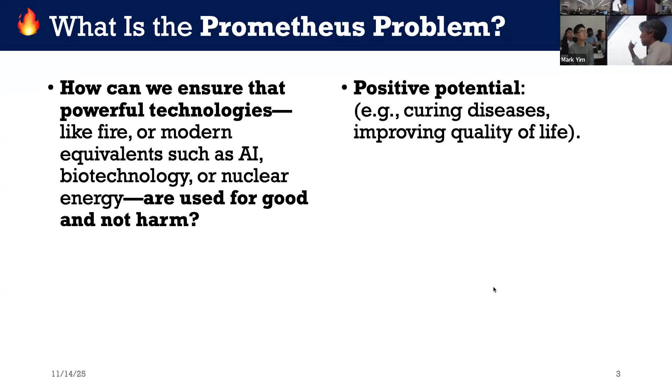So what is the Prometheus problem? Essentially, how can we ensure that the technologies that we develop as scientists and engineers can be used in a good way, not the bad way? There's always a good side and a bad side to different things. The positive potential, you make some kind of cure for some disease, or you develop some improvement to the quality of life.

On the other side, if we have some high-tech cameras or something that's really great for a variety of things, flying drones, but they can also be used for surveillance, or there are bad sides to autonomous weapons, environmental damage, or things that we do that can be negative. And so there's often the weighting, how do we evaluate the good versus the bad? And that's essentially what we're thinking about with the Prometheus problem.

So essentially the talk I'm going to give today is split into 2 parts. I'm going to talk about modular reconfigurable robots. This is what I've been doing for 3 decades. So I'll talk about that, and then in the context of robotics, I want to spend a little bit of time about responsible innovation and think about how robotics could relate to this Prometheus problem.

And also, hopefully, we can have an interactive discussion with you, just to think about what is responsible innovation, how should we think about things in terms of helping scientists and engineers in education in universities as we develop things to do things responsibly.

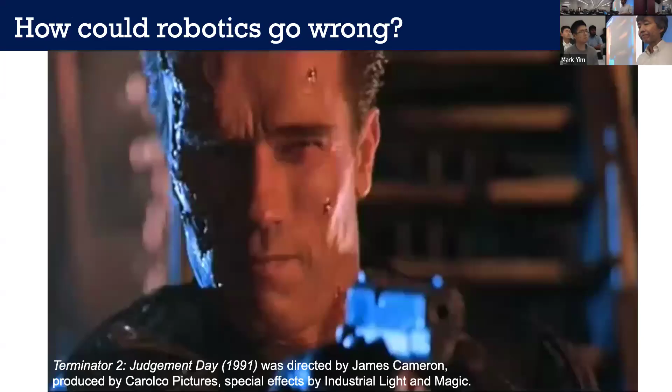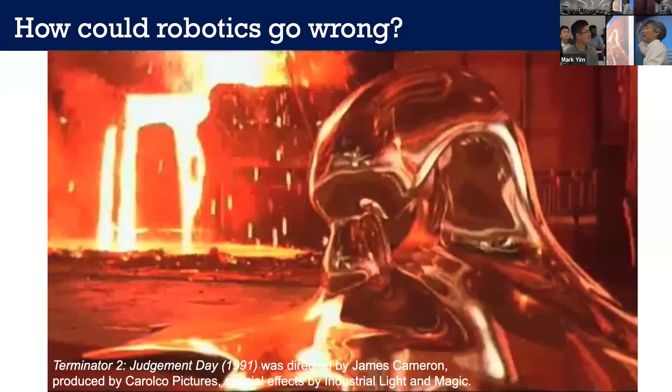So with robotics, what could go wrong? I don't know if many of you have seen this. This is Terminator 2, the T-1000 robot. How many people have not seen this movie? Just a couple. Wow. Okay. Usually it's young students that haven't seen this movie because it's too old. It's from 1991.

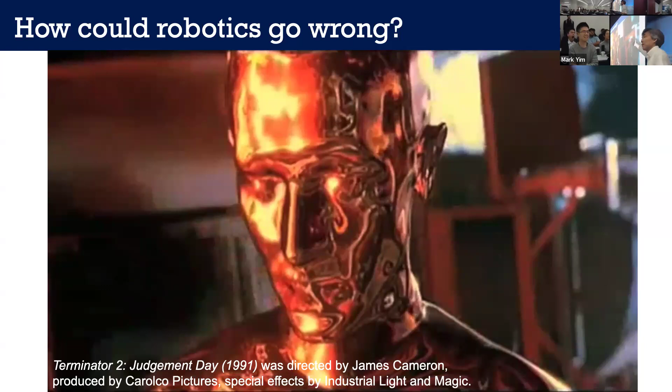But if you haven't seen it, essentially, it's the Terminator movies. It's a robot. In this case, it's the liquid metal robot, evil, kills people, bad, you can't stop them, you can't kill them. That's the type of thing. So, what could go wrong with robotics? This is like the classic example. And in fact, when we talk about modular robotics, people say, oh, modular robotics is the first step to this kind of liquid metal robot.

So what are modular robots? Essentially, modular robots are robots that are made up of repeated modules that you put together into larger forms. And there's essentially 3 or 4 different types of architectures that we can classify them. And there's what I call the chain type. So you have modules that you put together into chains, articulated chains.

And then there's a lattice type where the modules form into a larger lattice and can form structures. And then there's something we call the hybrid, which reconfigures using the lattice shape, but it can form articulated arms and things like that. So let me just show you some more examples of what each one of those are.

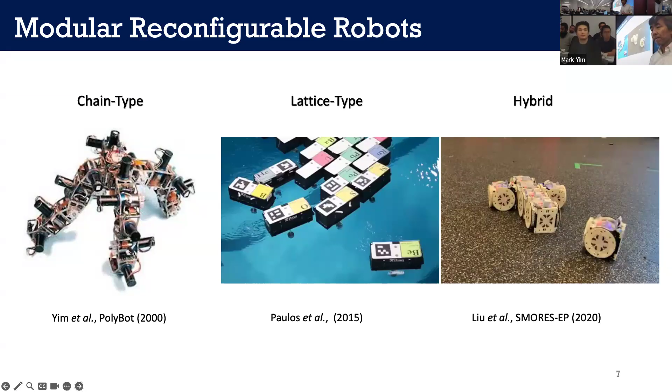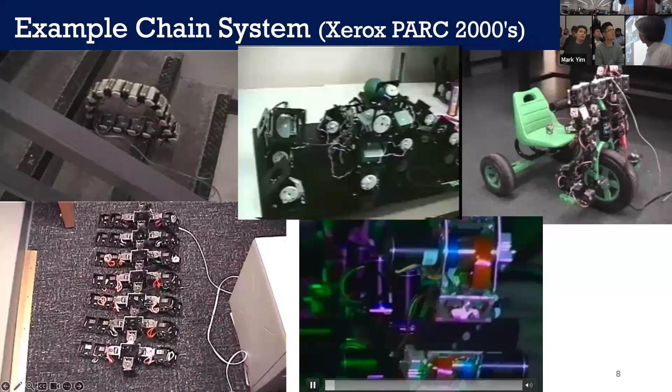So this is just videos. These are all from Xerox PARC before I went to Penn, so this is 25 years ago. These are all different robots that we called PolyBot that you can put together and that can do things like climb stairs, different forms of locomotion. The middle one is a video that's showing manipulation. Of course, we had a Xerox box on there. It was good to put the Xerox logo in our demos.

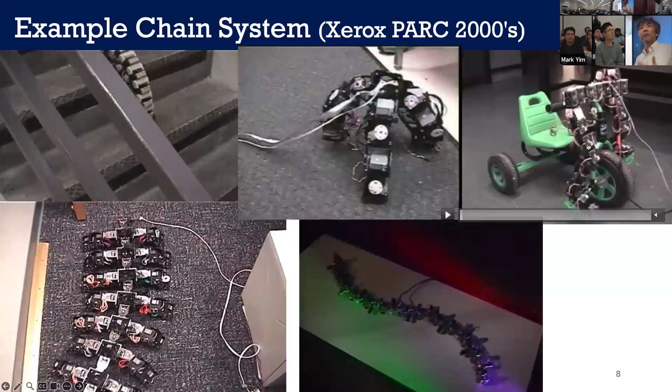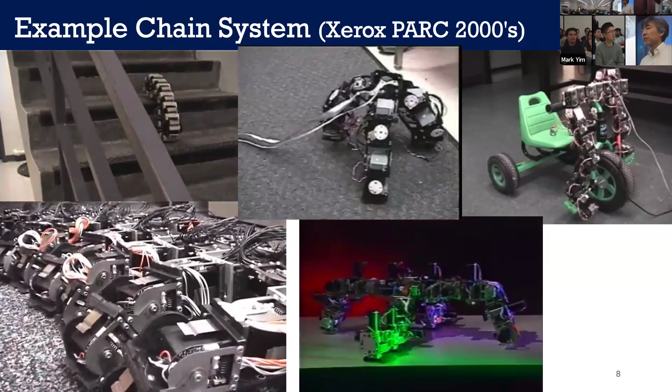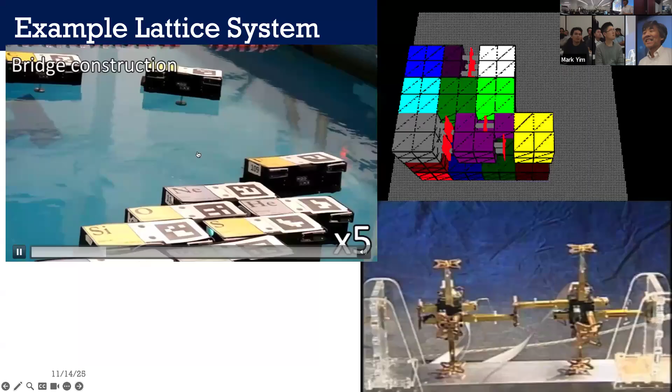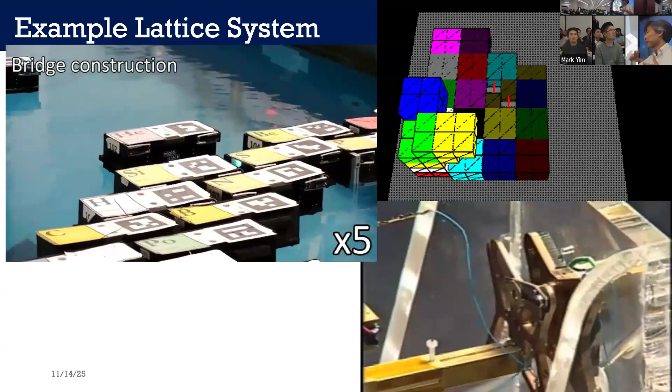This is a DARPA sponsored project that was called TEMP. The idea is this is a scale model of ISO containers. So large 20-foot containers that if they were out in the ocean, they would jump off the boat and then drive around, and you can form large floating platforms like an airfield, or in this particular case, a bridge that spans from one side of a land to another side, and you could drive cars across it or something like that. So that's forming different shapes in 2D.

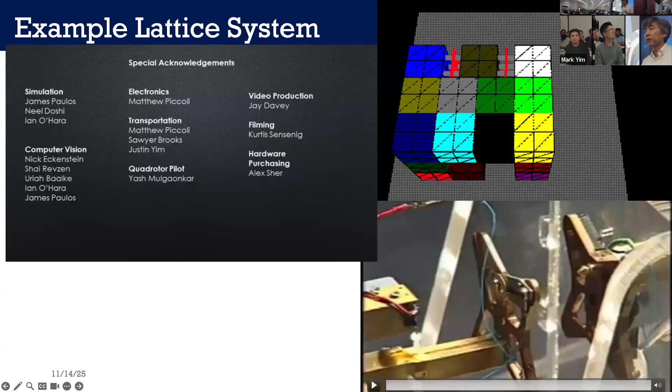This is actually what's called TeleCube. The idea here is that you have modules that form lattices, but each module is essentially a cube that has faces that can expand out and attach to other modules. And then in this case, you can form shapes by having them expand and shrink as they move around.

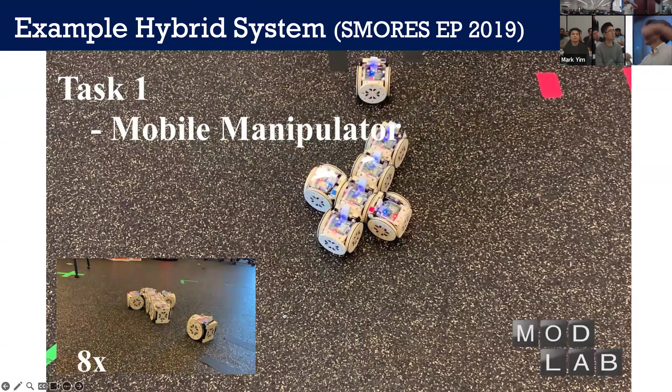So the lattice style system is good at forming shapes, but not necessarily doing things. The chain style is much better at forming arms. If you have arms, you can do articulated things. You can push on objects, manipulate objects, and that type of thing. But the chain style tended to be more difficult to reconfigure. So the hybrid one is kind of both. You can reconfigure more easily using the lattice style configurations, and then form arms or whatever you want to do some useful things.

Okay, so what can you do with these? 25 years ago, a quarter century ago, before some of you were born, we wrote a paper where I said there are the three promises of modular robotics. They can be versatile because you can change their shape to adapt to whatever task you need to do. They can be robust because if one of the modules fails, you can reconfigure. It's redundant, so you can throw away that module and keep going. They can be low cost because you have repeated modules, so you can use economies of scale, and the cost of the modules goes down.

At that time, the modular self-reconfigurable robotics research group was growing. There were more and more people. 10 years later, Kasper Stoy said this at one of the workshops we had: in reality, these things don't do anything useful, they break all the time, and they're very expensive. So basically, the first one, it's true. We haven't done anything useful with them. You don't see them anywhere doing anything useful. But I still think they're versatile in the sense that we've shown hundreds of different types of tasks we can do. So it's versatile, it's just not necessarily useful.

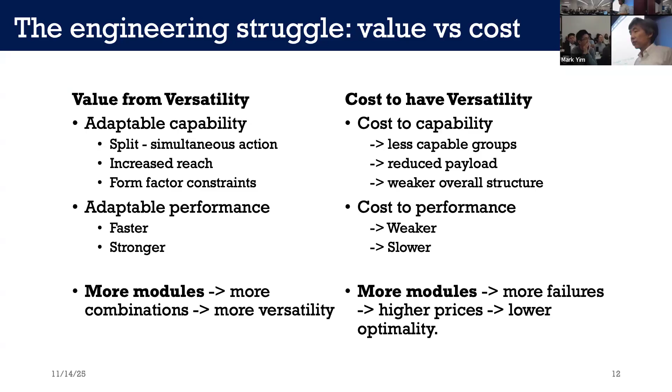So what I'd like to do is talk about 3 different issues with modular robotics. The first one is size and the number of modules. There is a tendency in the community that's been around for a while of shrinking the modules, making smaller and smaller modules. Maybe people are thinking about the T1000, that molecule-size liquid metal robot. Essentially, if you have a task that's human scale, then the smaller the module, the more modules it will have to do that task, and so it can be more versatile.

If you have more modules, you have more CPUs, more sensors, more degrees of freedom. And each module is smaller, takes up less material, so lower cost. There's economies of scale that can come into play. On the other side, making things smaller is harder. Every time you make things smaller, it's going to be the smaller CPU, the smaller sensors, and usually they're not as good. The total system cost is what you really want to worry about. If you have a $1 module, that's great, but if you need 1 million of them, it costs you $1 million. And sometimes economies of scale don't actually scale faster than the total system cost.

So I want to stress the difficulty in miniaturization. My group has designed many dozens of different systems, and all the time, the thing that we struggle most with is squeezing things into the design. The miniaturization is the hardest part. So I want to give you some examples. Here are some of the lattice-style robots.

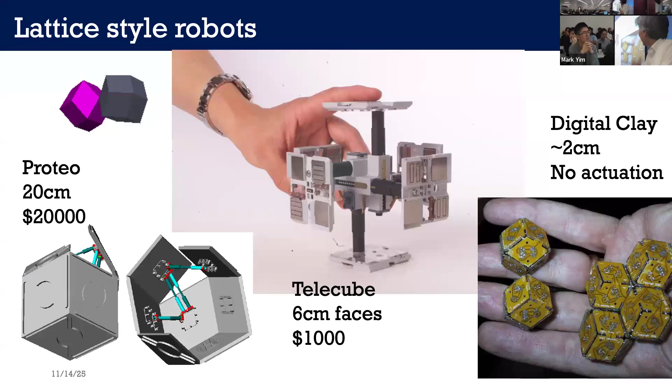Essentially, the cost of shrinking down is loss of functionality. And it's just hard. At the time, putting actuators into something that was 2 centimeters was really hard. And theoretically, you could do something like shape memory alloys, but even then, getting it to work in useful ways is difficult.

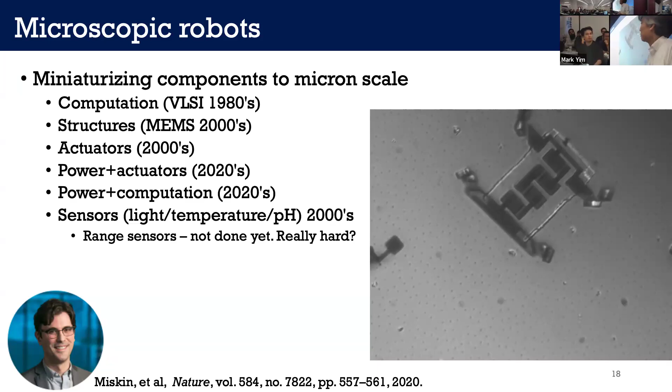You can put temperature sensors, you can put pH sensors, you can put sensors that sense different properties of the area, but range sensors are very difficult. And that's the thing that I think every mobile robot has these days. So if someone could come up with a miniaturized low power range sensor, that would be super useful. I don't know how to do it, but that could be the next step. Okay, so that's miniaturization. Maybe we're getting towards, I don't know, it's hard getting to the T1000.

Next issue is strength. One of the things with modules is that we characterize them with something that we call characteristic strength. That is, as you put modules end to end, how many can you extend in a cantilever fashion that can support its own weight? And usually there's this square cube property where the actuation strength goes by the square, but the mass goes up by the cube. Therefore, it gets harder and harder, especially when you're cantilevered. The torque is not quite quadratic, but something like that. It goes more than linear.

So it turns out that for our old polybot systems, this one had a characteristic strength of about 3. It could only lift about 3 modules. This one, the G1V3, where we had a harmonic drive, we put everything in there to make it as strong as possible. It still only had a characteristic strength of about 8. It could only hold about 8 of its own weight. So that really limits what you can do. You can't have a system that's really big by extending a single arm because it can't lift its arm alone. So one thing you may think about is doing things in parallel.

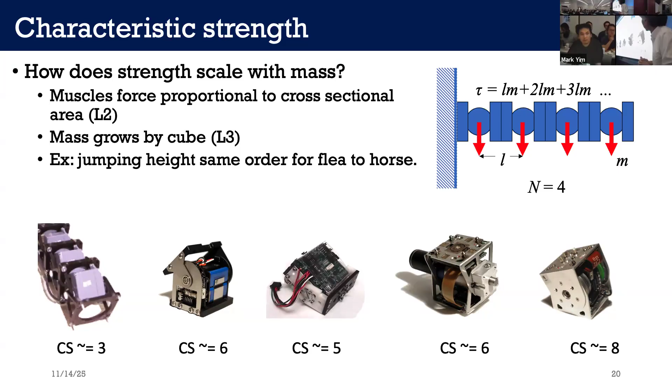If you look at animals, it's kind of interesting. The jumping height of a flea is about 20 centimeters. The jumping height of a horse is about 100 centimeters. That's roughly the same order of magnitude, even though the mass is 6 orders of magnitude different. So the jumping height is basically the same for animals, probably because the muscle's force is proportional to the cross-sectional area. It's L squared versus cube. But if muscles need to be stronger, you put more in parallel. So can we do that with modules?

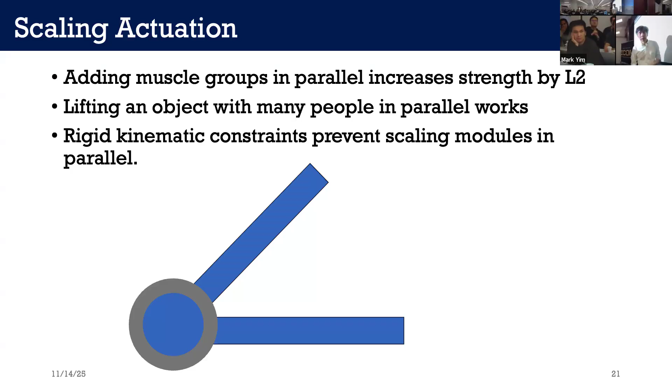Theoretically, you could attach a module to a joint, and if you wanted more strength, you could add another module along the axis and double the strength, or just keep adding them along the axis. But you can't put them elsewhere. If you put one here, maybe it could help a little bit. If you put multiple ones stacked together, you could kind of help it move a little. But because the joint axis is different, you can't just add them. Here you can add them linearly. It's not L squared, it's just L, linear with the number of modules you add, which is unfortunate. So we can't really easily put them in parallel the way you would with muscles.

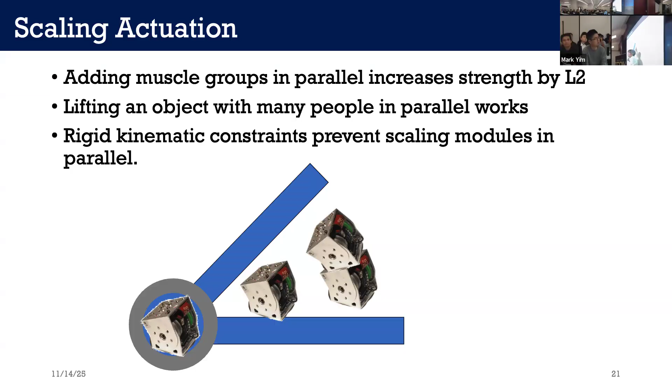Also, intuitively, you can think of it this way: if you want to lift this table and it's really heavy, you get 2 people. If it's even more heavy, you get 5 people, and everyone kind of lifts in parallel. But that's because the kinematics are such that they're not constrained, whereas here, every time you add a module, the kinematics are constrained by how you put them together.

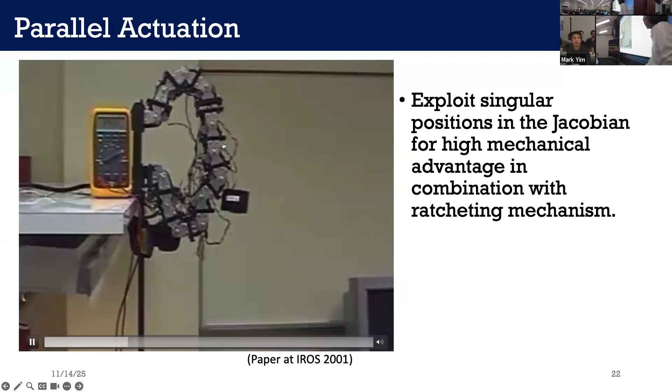So one interesting thing we can do if we put things in parallel is exploit the singularities. What's happening here is there's a loop and there's a ratchet system on each module, and it goes to a singularity. When you're in a singularity, you have very large mechanical advantage. So you move one end into a singularity, and it's lifting a weight here. I think it's like a kilogram or something.

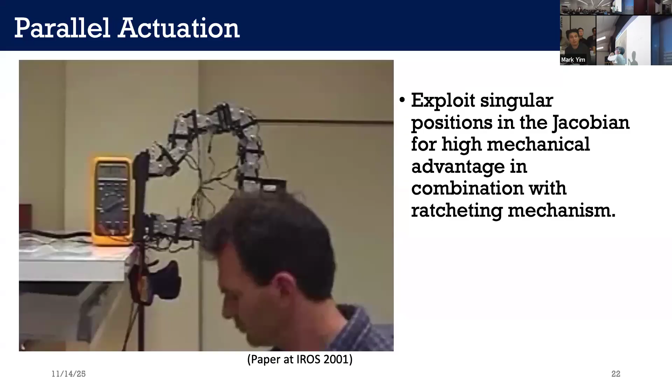And it's 6 modules; it would already be at its limit if it was just a serial string. But because it's a loop, it locks one half, gets the other half to move through a singularity to move that part up, locks this one, moves this one to a singularity, moves that up. And so by the process of ratcheting, you can lift very large forces. So that's one way to exploit a parallel loop mechanism.

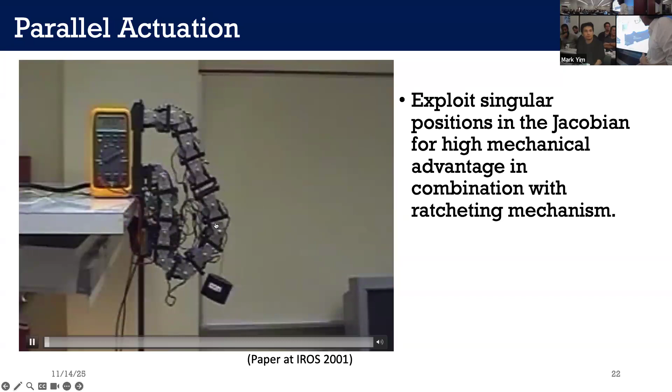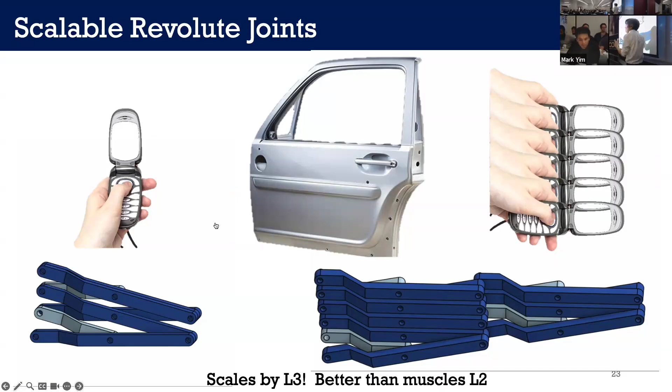The other thing, this is unpublished work, but something I'm pretty excited about, is how we can actually get scalable revolute joints. Not only is the actuation a problem, but the structure itself is a problem. If you look at the hinge in a flip phone, you could theoretically attach a bunch of flip phones together and have a hinge that's linearly stronger, but you couldn't put them together at the size of a car door and have it be as strong as a car door, because the diameter of the hinge is just too small. It's just linearly increasing the length, not making it stronger in its diameter.

So one thing we can do is use basically a scissor mechanism. The critical thing to notice here is that the axle is virtual. You can add more layers to this scissor mechanism, and it becomes much stronger because we have so many more joints. The kinematics are not constrained; there's a virtual hinge instead.

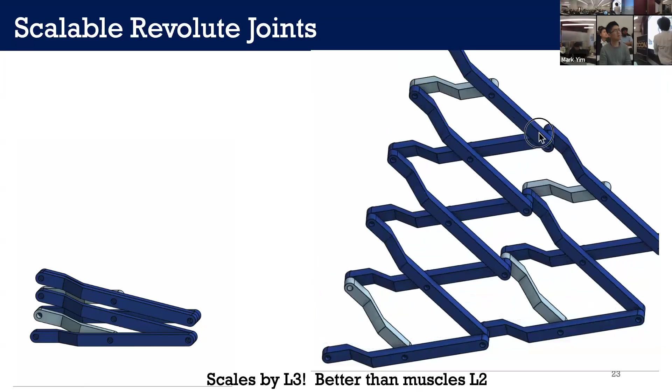You can take that same process and extend it out this way as well. So not only higher, you can take each layer and extend it out this way. It's 3-dimensional; you can extend in 3 dimensions instead of just 1. So now you have a way that scales even better than muscles, which are squared. It's actually cubed in terms of the way the strength increases in the joint.

If you add a motor at every joint, you've also scaled the actuation much better than you can with motors. One of the exciting things we theorized, and this is all unpublished and we haven't finished the experimental work yet, is that if we buy these little motors, almost like pager motors, from a company in China, a bit more expensive now with the tariffs, and by our calculations take 100 of them and put them together in this type of system, it can be faster, stronger in terms of higher maximum torque, and lower cost than an equivalent large motor you might use for a humanoid or a robot dog.

We've done the comparison with a T-motor, and it's just better in all aspects except volume. With all these distributed motors, it takes up much larger space, but it's lighter, faster, stronger. The reason it's better is thermal characteristics. With a typical T-motor, you cannot run it at stall; you'll burn up the coils because you can't dissipate the heat. With 100 of these spread out, thermal dissipation is many times better, so you can actually run it at stall, and the max torque is much better.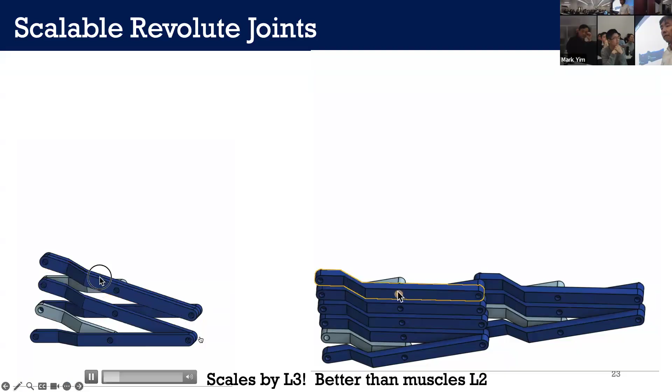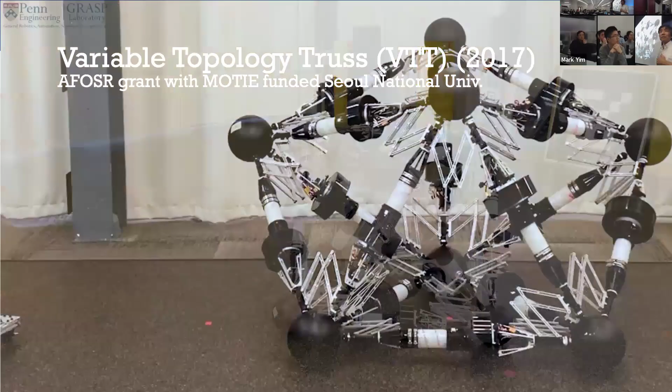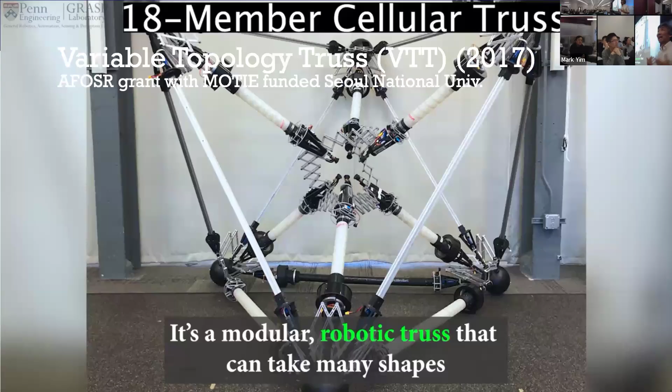Okay, so another thing about size and strength is something we call the variable topology truss. So this is kind of the opposite of miniaturization. This is big. This is very big. Part of the problem here was that the Air Force was looking at, can we have a system that could support a damaged building? So we need the system to be as big as a building and be strong enough to hold it up. And so this is one way that can do it.

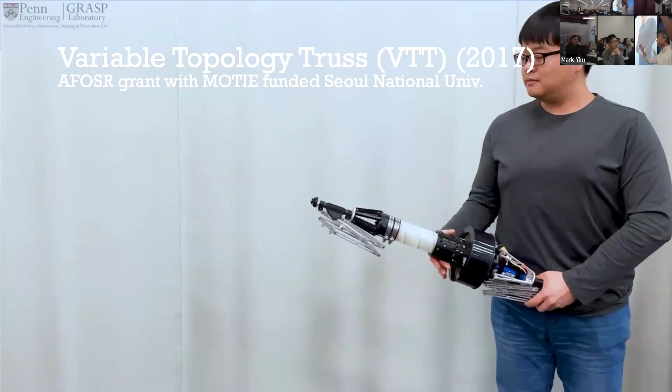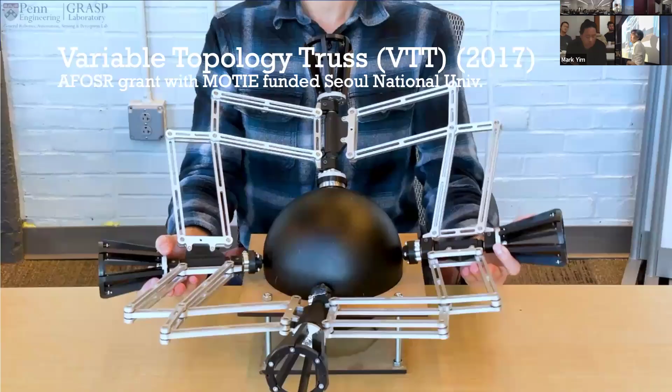Trusses are essentially stronger and materially efficient. The reason that we have cranes that are made of trusses and we have bridges, the interior of buildings are made out of trusses is because it's materially much more efficient. This is the node of the truss that shows that it's reconfigurable in the sense that you can add multiple truss elements to the node and increase the degree of the node, again, because we have this virtual axis in the center. So we can do reconfiguration with them.

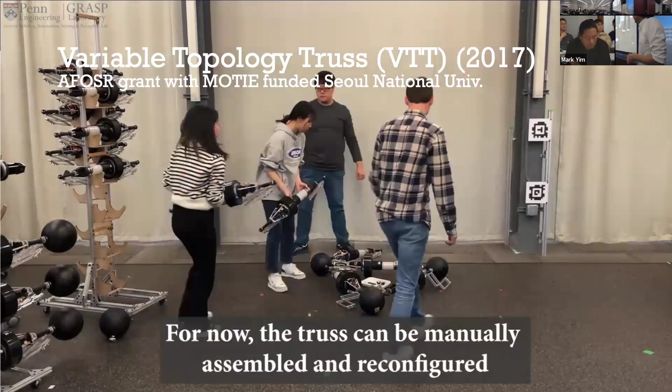I think earlier you saw these are prismatic joints, something we call the spiral zipper, which have a very high expansion ratio. So we can form lots of different shapes, various topologies. So here the students are putting together a bunch of tetrahedrons or other shapes. We can do lots of different things with it.

Another kind of fun thing we can do is path planning is a little bit different when you have a robot that can change its size. Obstacles, you know, you can become really tiny if you can change your size, which is kind of useful. It's kind of a fun little thing we can do.

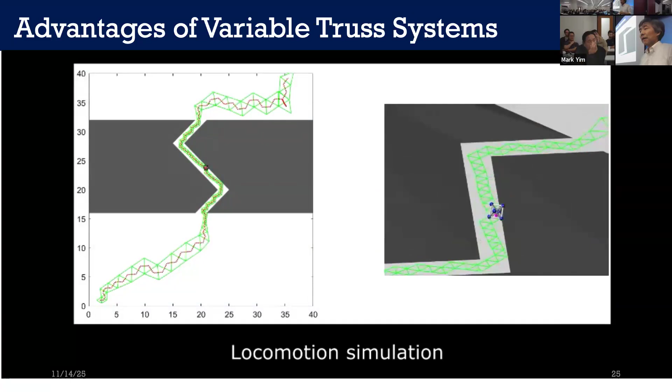We have a metal version that's spring steel. So that's what we would use to be super strong and support a ton. But that would be super dangerous if you got this kind of spring steel flailing around, basically like a sharp knife. So we use the plastic one in general.

For reconfiguration, one of the things we've discovered just recently, we just published this, it's much easier to reconfigure in 2D than in 3D. So we're able to have the system, they're just the prismatic joints that can move. If you can get them to move in the plane and then dock, I don't have a video of the docking, but there's a way that the elements can dock together. You can form larger structures. In this case, it's formed the flattened shape of a tetrahedron.

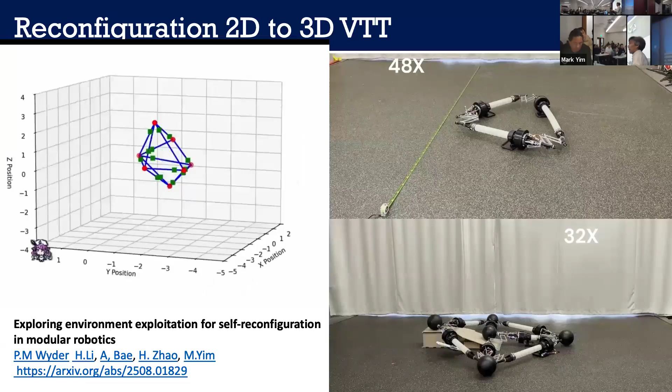Once you're in a tetrahedron, the problem is you're in a singularity because you're all flat. But you can exploit environmental features to get yourself out of that singularity. So in this particular case, if you find a little hill, you crawl over the hill, the node is lifted up high enough out of the singularity so then you can pass up, now you've got a 3D structure. So that's reconfigurability. What are the issues with reconfigurability? This is the thing that primarily distinguishes self-reconfigurable systems from other systems.

Let's see, how are we doing on time? We have another half hour. Half hour? Yeah, all right. Okay, all right.

So the main thing is the ability to attach and detach. That's what we're adding. And to detach, you just basically fall apart. So that's relatively easy. To attach, there are 3 steps of docking. You have to approach, usually there's some precision required to get the things close enough so that you actually make contact. That's where there's something we call open loop guided motion within what we call an area of acceptance. So that's the thing that a lot of groups try to work on for their modular reconfigurable docking systems. You want to have a large area of acceptance.

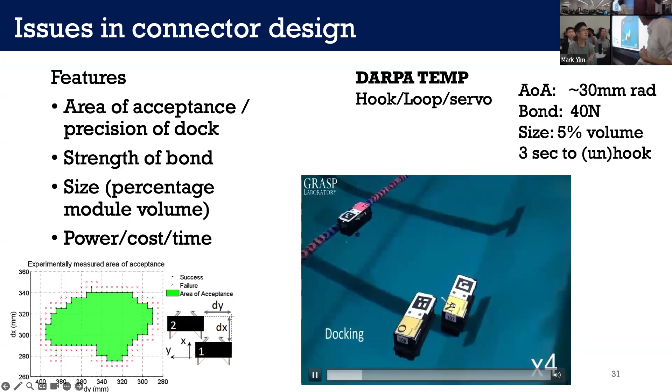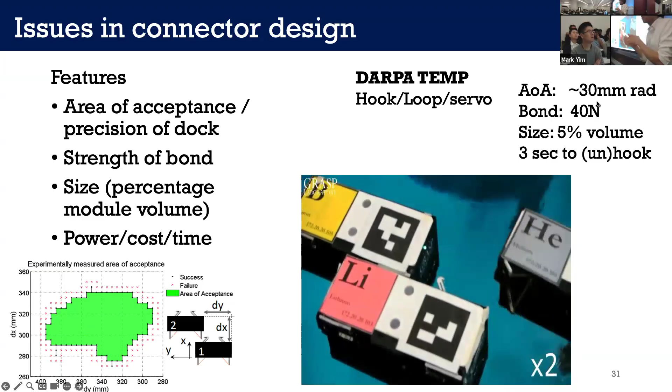So let me just give some examples. For the DARPA TEMP system, it has this kind of hook and loop system. So one module will stick out a string in a loop, and then a hook will come out and grab that loop and pull it in together. Here you can see, yeah, there's the hook grabbing that string. This graph here shows how we mapped out what that area of acceptance is. So the area of acceptance is basically 3 centimeters out in terms of what it can reach. It can hold about 40 newtons and takes up about 5% of the volume.

This is another system. This is the Polybot G2 system. There was a kind of a, what do we call this? A little nub thing that sticks out and goes into a hole, where there's a hook that grabs onto the groove. That's actuated by a shape memory alloy.

So they're all chamfered, which helps a little bit in terms of a peg and hole type situation, but not a lot. It's only about a 3 millimeter error that it can compensate for. And it's relatively low profile, all within the width of this end plate.

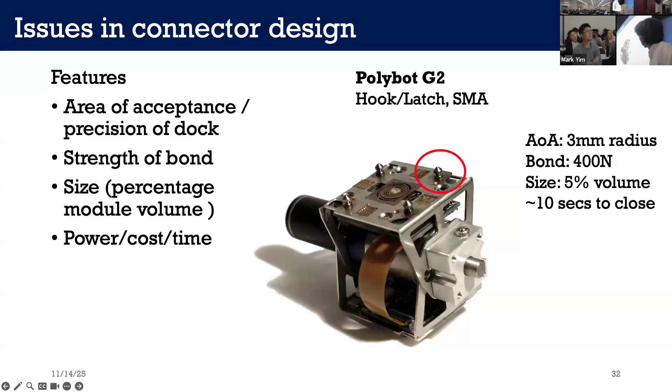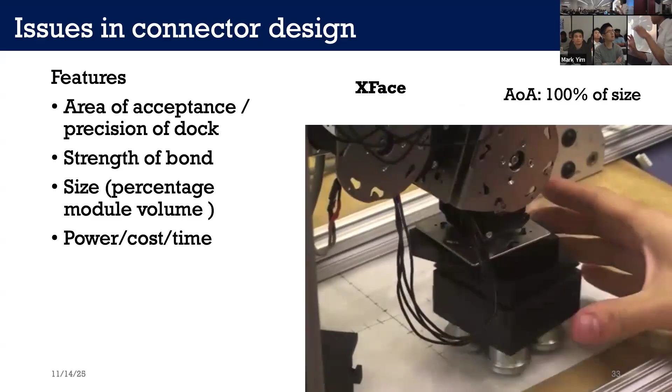I had one of my students work on increasing that area of acceptance. So here's a system that has basically 100% of the size of the face, essentially, and with large errors in angle as well. It kind of automatically aligns if you have two systems that are approached together.

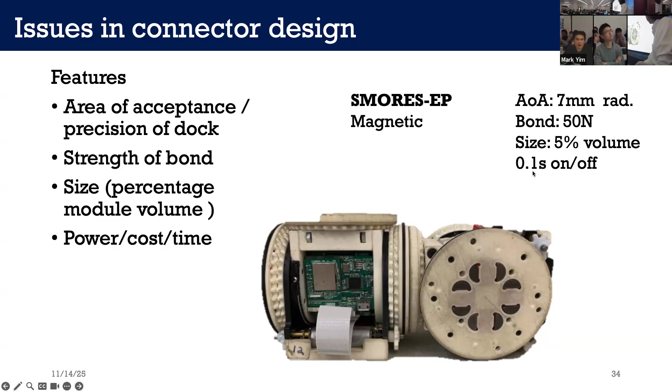The SMORES system is interesting. It uses an electropermanent magnet, not an electromagnet. So I'll talk a little bit more about that. It can hold about 50 newtons and deal with errors up to 7 millimeters. It's very fast. And it's also low profile.

So this is a system by Henrik Lund and David Christensen and Kasper Stoy called Atron, which is pretty old. But this is the system that I saw had the best latching mechanism of any self-reconfigurable robot. It can attach 8 modules to each one. It has basically hooks that come out and grab onto this bar. So it's very strong. It can hold something like 800 newtons. Very, very strong. It has a pretty good range of motion to grab on.

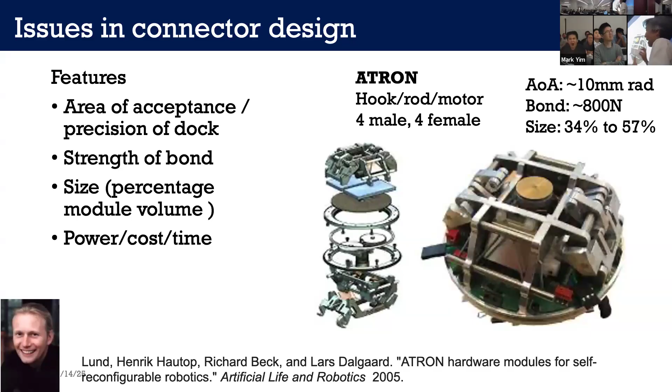But the thing was, about half of the volume of the module was the latching mechanism. So you had to dedicate most of the module to this grabbing system. Of course, they had 8 of them as well. But in a self-reconfiguring system, where self-reconfiguration is the main thing, that may be okay. It can't really do much else; it has 1 degree of freedom for rotating.

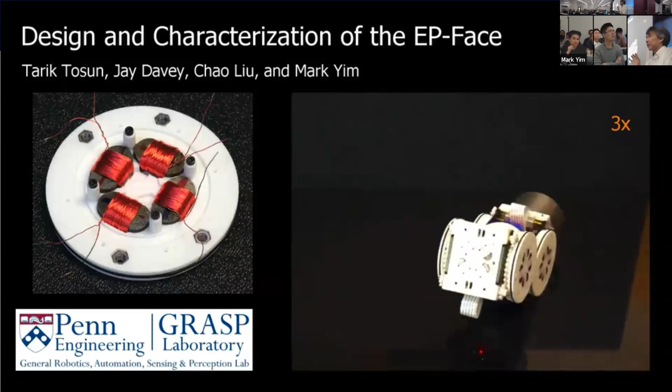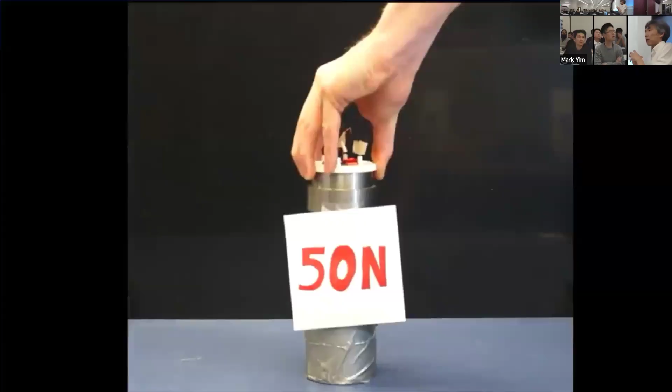Okay, so this is the electropermanent magnet, something we call the EP face. Just to give you an example, the way it works is it has magnets with coils on them. You pulse a high current through the coils enough to flip one set of magnets. So essentially that'll turn the magnets on, or you can pulse it in the opposite polarity and it'll turn the magnets off.

So here you can see the different relative errors that it can still pull itself together from. Another thing for self-reconfiguration is that it's very low profile, and you can do this kind of sliding motion, which helps a lot with self-collision, which is the main issue with planning for these types of systems.

So how many people have heard of or know how to use electropermanent magnets? A couple, good. Okay, pretty good. It used to be that I would talk to people and they'd never heard of electropermanent magnets. They always think electromagnets. But this is the kind of cool technology that, I'm not going to go into detail because we don't have time, but if you're interested, talk to these people, because it's really cool. The fact that you can turn a magnet on and off with just a pulse and not have to keep wasting all that electricity is very enabling.

Another interesting thing that we can do with latching systems: one of the problems with the DARPA project was that we had to survive what was called sea state 3. Sea state 3 is the amount of waves in the ocean. And if you have a large structure like this in sea state 3, if it was rigid, the forces on the robot are huge. You would basically need a 6-inch steel rod going through these things to support the moments from the buoyant forces.

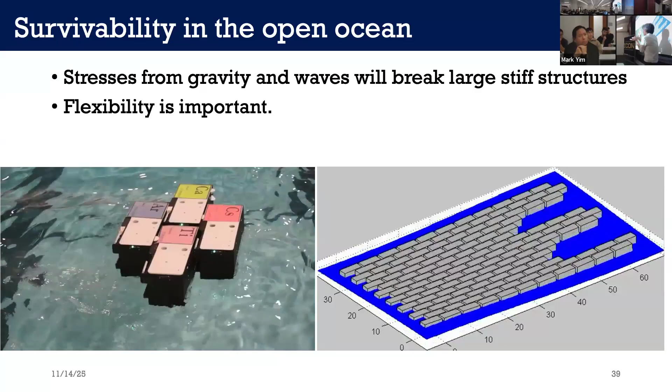So a better way to deal with that, instead of having a rigid object, is to comply. Have the robot just comply with the wave, and then you're okay. And we can do that because we have string-based latching. So we just let the string out a little bit, comply, and then when we need to be flat, you can bring them together. For example, if we were a landing strip and an airplane was going to land on this structure, you'd want the place where the airplane was touching to be flat, so you could theoretically have that flat part right underneath the wheels as it's landing. We never demonstrated it, but I think it would have been really cool.

Okay, so I'm just going to say one thing real quick about reconfiguration algorithms. The primary thing with reconfiguration algorithms is self-collision.

Here, this is Kasper Stoy's work from a long time ago, showing a bunch of modules. It's a fictional system, but it's essentially a cube that can move along next to each other. The way he got it to work is to have the target structure be porous. There's lots of areas for modules to move. If you don't have that, it becomes very difficult to do the reconfiguration.

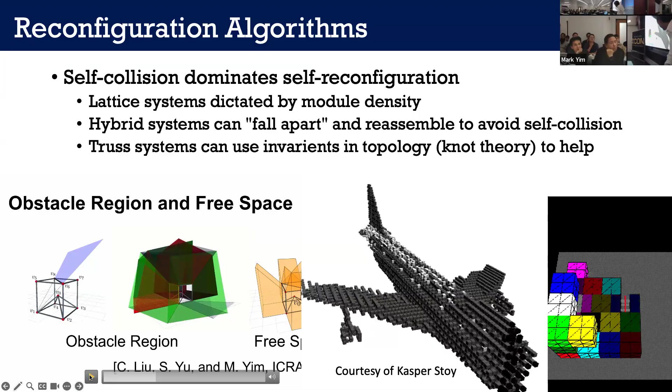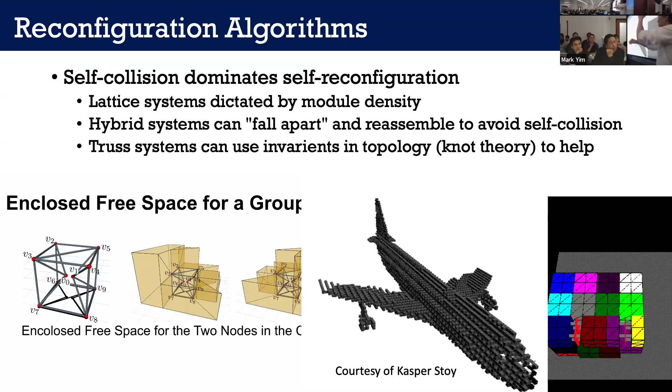These guys, we came up with primitives that work, but it's because the modules can compress and be smaller within themselves to move around. For even the truss systems, self-reconfiguring VTT, self-collision of these rods is something that is difficult. And so we have a couple tools using knot theory and the topology of these types of systems that aid in trying to figure out when you will have self-collision or not, which is interesting. Anyway, so we have a variety of papers on that.

Last thing I want to talk about with self-reconfiguration is an interesting problem that I think I'm finally able to start to address, which is: if you have a modular robot system that can have lots of different shapes, how do you choose what shape it should be? And that's based on the task. If you've got some tasks, you want to do some type of assembly, what is the right shape? I know a lot of people think these days, humanoids. Humans can do anything, so it should be a humanoid shape. I think that's probably not true.

The optimal shape, who knows what it could be, but I think I have a way of starting to address that problem, which is if you start with the task. So if you have a basic task, here's an example we have just made a proposal on. Let's say you want to deliver a first aid kit to someone and it's in an environment like a forest. So you can ask a VLM system, what would be a good robot system? It can look at the environment and say, for this type of environment, these are the types of robots that might work well.

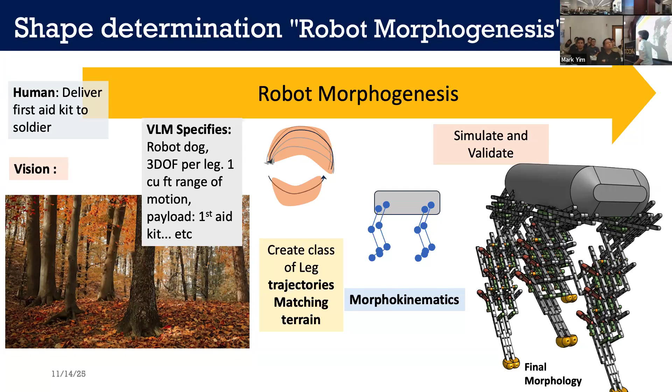Based on the geometry of the environment, maybe you know what types of motions. Say it says a dog: the length needs to be this big, the payload that big, and the sources you need. You can do what we call morphokinematics, generate kinematics that will give these types of motions for each leg. You can do the distribution of what it actually should be, and then you can put together a robot. You can simulate and validate that system and then iterate to see if it actually works. I think that's the future of where we're going with this system.

And this is a figure for a proposal that we just submitted. With the government shutdown, everything stopped, and we were supposed to hear about this a couple weeks ago. Of course, we didn't. I'm not going to say we won't win, but hopefully we'll win and get that.

So essentially, this new project that we're working on uses this parallel actuation. We're going to use machine learning, blah, blah, blah. There's about a dozen professors involved in this proposal for control. The key difference between this and all the previous work is that we're doing fine-grained modules. All the modules that I showed you before had computation, motors, actuators, sensors all together on a single system. And because of that, it was super inefficient.

Because of that, it couldn't do anything useful because it was so inefficient. It barely lifted the arm up. If we don't necessarily have to have a motor at every place, we can have structures that are parallel, we can grow things, we can distribute sensors where we need them, we can be much more efficient and hopefully start to do useful things. Okay, that's the end of the modular robotics part.

Shoot, I took up too much time. Any questions on modular robots?

Yeah, fascinating talk. I have a question about the energy efficiency or the energy consumption. Do you have any general comments for reconfigurable robots? So for energy efficiency in general, these systems are inefficient in general for the modular robot systems because they have all this redundancy, motors everywhere, computers everywhere. Theoretically, you could shut them down, but they're still there. They're heavy. Usually you want things to be light if possible, if you want to save energy.

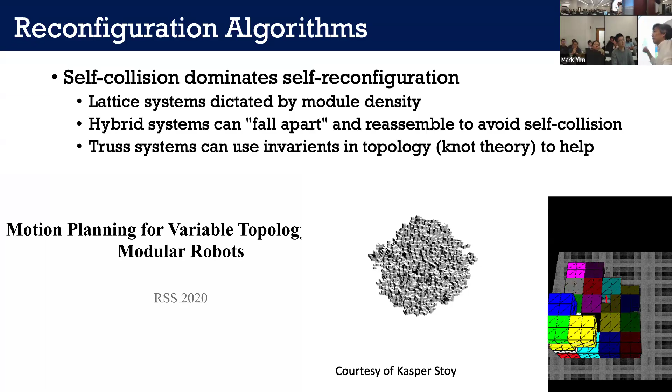That's where I think if you are able to do things in a fine-grained scale, you can make things lighter where they need to be. You can be more efficient. Hopefully, they'll be more energy efficient.

Yeah. I think most of the robots are kind of rigid. So are you guys thinking of moving on to soft robots instead of rigid? Yes. So actually, part of this proposal was hybrid, mixed soft and hard. So these links, some of them, depending on what we need, can be soft or hard. This was a giant proposal, so we had everything: soft, hard, distributed, centralized, machine learning.

Yeah. I wonder if you have any thoughts on how to start to think about when the composition actually becomes more than its parts, especially if you're thinking about heterogeneous components. Do we think that we could get a system with this modularity that becomes more than its parts? So I guess what does it mean to be more than its components? Certainly a system that's put together will be able to do more than the individual components by themselves.

I guess maybe specifically with computation, the benefits of distributing the computation instead of centralizing it. Okay, so for distributed computation, there are aspects of efficiency and robustness. You may have parts where the hand can do localized computation for sensing and actuation because it's all local and doesn't need to go further than that. So it doesn't need to communicate up to the brain. So it could theoretically be faster, maybe not use as much information, and so that can help.

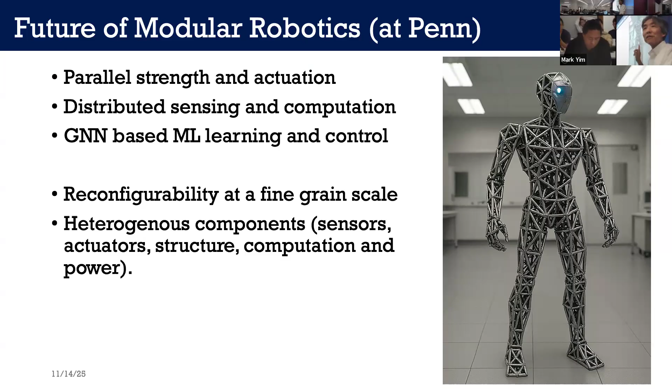In terms of robustness, if the hand breaks, or like the Iron Giant, it can roll off by itself to do whatever it needs before it comes back, so theoretically it could be more robust. I want to go to responsible innovation just because we don't have time, but we'll have lots of time for questions afterwards.

When the dean asked me to start up this effort, I said, we're engineers, we're not good at this. This is sociologists, lawyers, maybe policymakers. That's really their area, but it's important. I think it's important for us to start to think about what we can do, and I'm hoping especially the educators here can help me think about these different types of things we can do.

We can educate the students. One of the things we're afraid of is that PhD students, researchers, people who are doing research, go blindly forward in whatever they're doing without necessarily thinking about the impact. There's the quote, you were so excited by what you could do, you never thought about whether you should. How do we support research? Can we help researchers to think about things, to teach other people, and that kind of stuff?

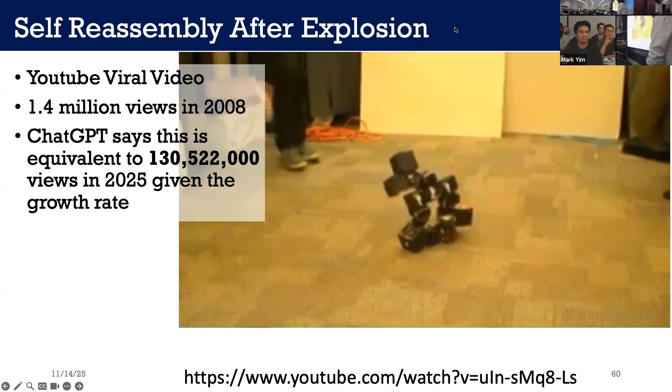So this is a video that I made in 2008. I asked ChatGPT. In 2008 there weren't that many YouTube videos and not that many people. So I asked ChatGPT to say what would be the equivalent views if I had 1.4 million. And it said, well, it's equivalent to 130 million people.

So what happens is there's a robot walking along. My student kicks it. So we call it self-reassembly after explosion. It falls apart. Each one of these little modules has an accelerometer on it; it detects that it's fallen over, it rights itself, goes into a search pattern. They have a smart camera on board, which was unusual at the time. Phone cameras weren't that popular. And the blinking LED is actually a communication method. So they do a search pattern and then they dock together and they continue moving.

So if you look at the types of things that people commented, there are things like, oh no, it's T-1000, it's Terminator 2, you can't kill it, that kind of thing, which is silly and a little bit ridiculous, a little bit untrue.

Okay, so what happens if we succeed? For our system, we have a self-reconfigurable robot. So, I had lunch with some of the PhD students here, and the exercise I asked them to go through is, think about your research. Think about your research and imagine that research is wildly successful.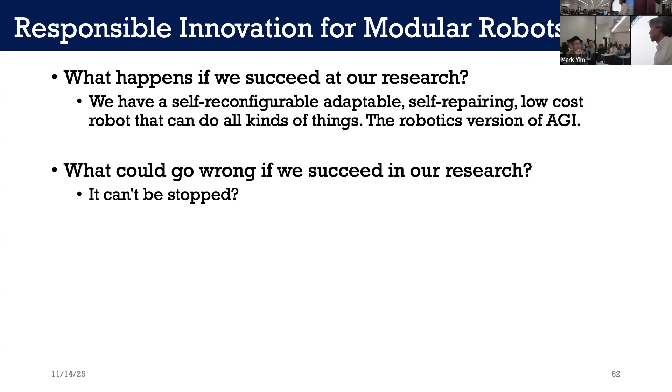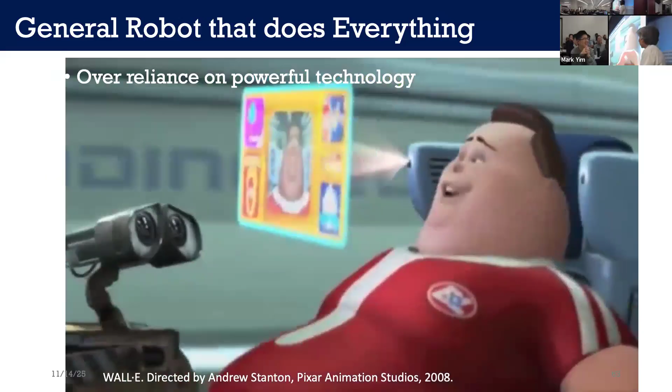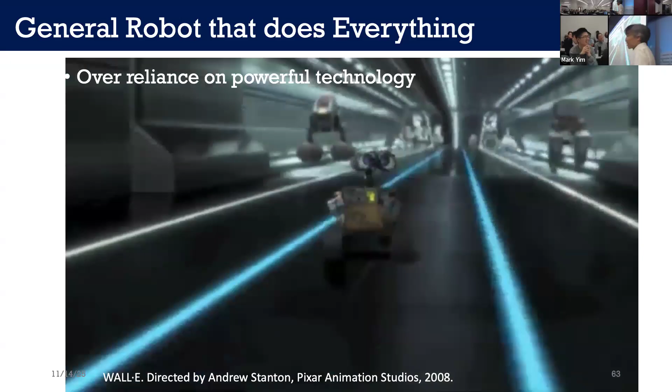Impact on the workforce is a common thing when we talk about successful robots. There are a couple things that are common. Now, this is a scene from WALL-E. I don't know how many of you have seen this, but basically over-reliance on technology: if robots do everything for you, then at the end of the movie people just become blobs. They can't even walk, everything is interacting through visual stuff, they lose their sense of their own agency, culture stagnates, they lose their connection with nature. So yeah, bad things can happen.

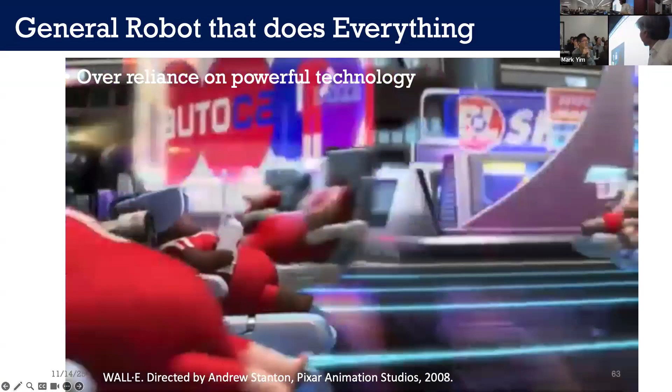There's basically one other major thing. I've done this several times with students talking about different aspects of robotics research, and the thing that often comes up and applies to most of the projects is security. Security is always a concern in one of two ways, or sometimes both. If you have any powerful technology, what happens if a bad actor takes control? Someone takes over your home robot that's your butler. Now it controls your house. It can steal from you. It can do whatever bad things it wants. That's always a worry.

Especially if you have a powerful technology, it can be used against you. So you need to somehow think about security. How can we get that in? The other thing is that a lot of these robotic systems have information technology built in, communications mechanisms, and so privacy is a concern as well. And that's true for very many robotic systems.